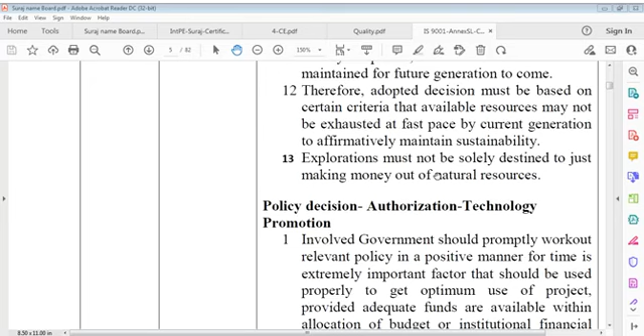Okay, dear friends, I tried to show you some glimpses of what I intend to do or what is intended to be done on the quality front, safety front. Usually I talk, but try that you should read yourself certain papers and pages. That's actually very important from each and every point of view.

Then this is one part while direct work on sites - that is construction methods, contracts, organizations, communication, coordination, and why we should always be behind the quality of works, quality of materials, and quality of whatever is involved in the system.

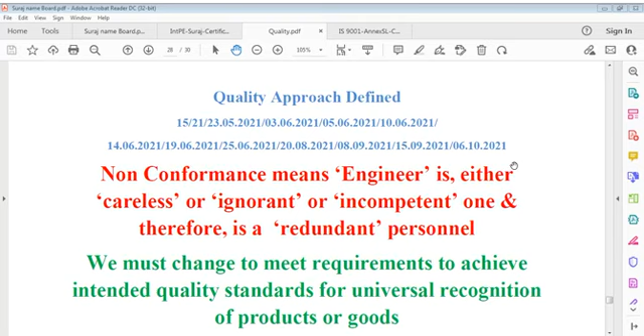This is a very important part to discuss. Now we talk about engineering - we talk about designs, we talk about prosecution of works, and we talk about applications when they are effective, and that's called engineering. And we can say a quality non-conforming product is called substandard and therefore rejected.

Yes, that's right. If we reject non-conforming product every time, just like we command in the management world - you do it right every time. Means do right every time, do quality work every time. You do the right work first time, every time. It is clear understanding from, you can say, organizational viewpoint or work viewpoint.

Just like we say safety first - yes, first everybody remains safe, must remain safe. Every time is first time. When you do something, do it safe, do not do unsafe. We can say nobody is safe if they are unsafe or they are ignorant.

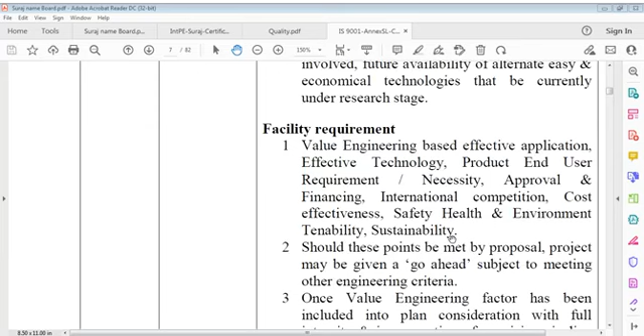It works. So we say policy decision, authorization, technology promotion. So that's what we have to do. Every government has to do. It's nothing new, it's not something extraordinary to do. It's job, we have to decide. And it's not for one country, it's for all countries. So we can say we had gone to certain justifications, and we may start

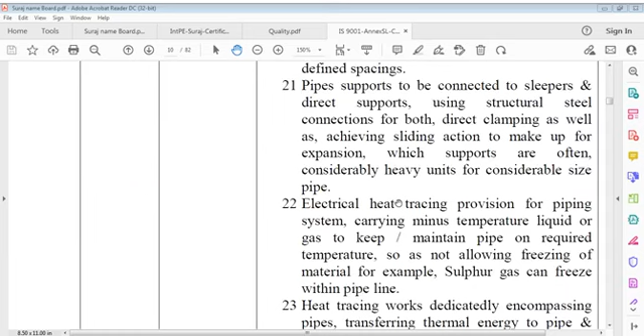We're talking of certain facilities yesterday. Facility justification, etc. we have done. I talked of that. What is justification? What is this? What is that? You are somewhere on components. Maybe I am jumping high. Let us say, what is that? Certain inclusions are here.

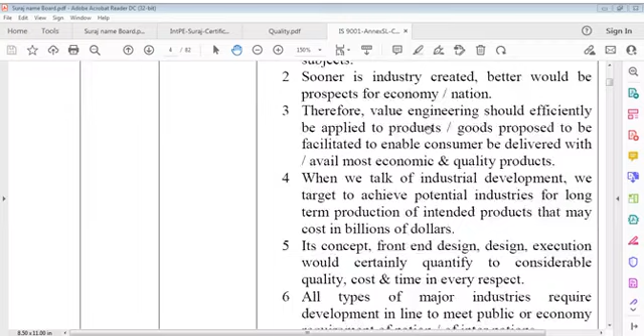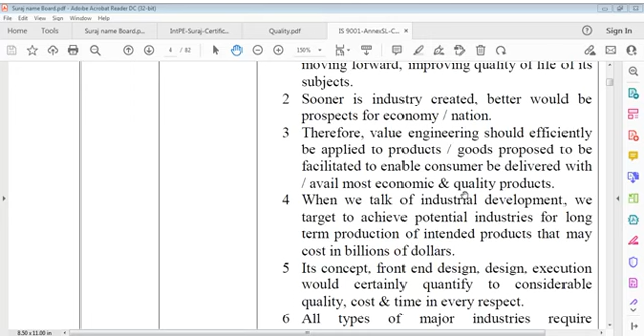When we talk of industrial development, we target to achieve a potential industry. We achieve potential industries for long-term production of intended products that may cost in billions. Its concept from front-end design feed execution was certainly quantified to considerable quality, cost, and time in every respect. All types of major industries require development in line to meet public or economic requirement of nation or of internations. Which class of industry should be promoted for modernization depends on various relevant criteria as well as development value engineering.

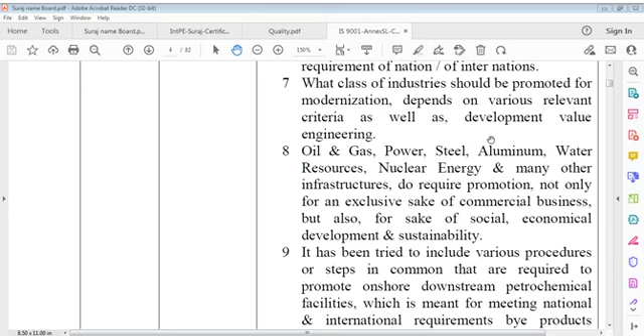We have discussed all this before. Now, back to discuss about, we were talking of policy decision, authorization - involved governments should promptly work out policies in positive, constructive, or development manner. For time is extremely significant factor which can be used properly to get optimum use of project, provided adequate funds are available within allocation of budget or institutional financial borrowing should be made.

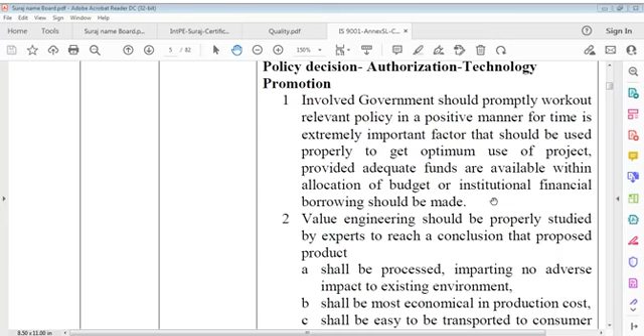Value engineering, as we discussed before, should be properly studied by experts to reach a conclusion. The proposed product shall be processed, imparting no adverse impact on existing environment, shall be most economical in production cost, be easy to be transported to consumer market, be most beneficial to national society from every aspect, view cost and economy uplift, as well as promote use of given technology and provide

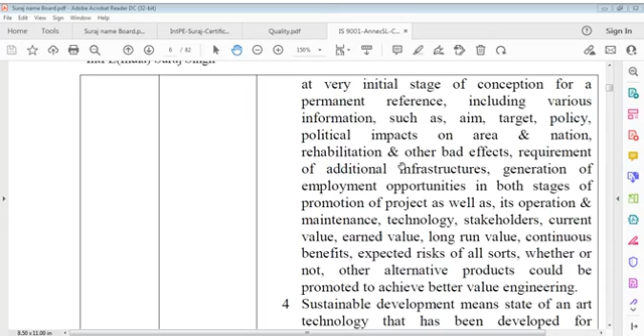Benefits to all people located globally in long run. A right and reliable charter must be constituted at very initial stage of conception for a permanent reference, including various information such as aim, target, policy, political impacts on area and nation or society, rehabilitation and other bad effects, requirements of additional infrastructure, generation of employment opportunities in both stages of promotion of project as well as its operation, and

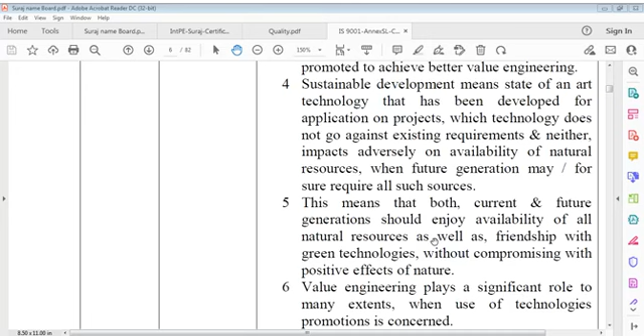Can say we have to achieve value engineering. In fact, maintenance technology, stakeholders, current value, earned value, long run value, continuous benefits, expected risks of all sorts, whether or not other alternative products could be promoted, achieve better value engineering. And sustainable development. Sustainable development means a state of an art technology on projects which technology does not go against can say existing requirements, or and neither now these are all concepts.

Value engineering work - it says value engineering plays a significant role to many extents. There could be options and options, all these are there. Now, what is saying facility requirement? Let's have a brief look on this. Value engineering based effective application, effective technology, product end user requirement.

Value engineering based effective application, effective technology, product end user requirement, necessity, approval and financing, international competition, cost effectiveness, safety, health and environment, tenability, sustainability. Should these points be met by social, economic reasons, the proposal or project may be given a go ahead.

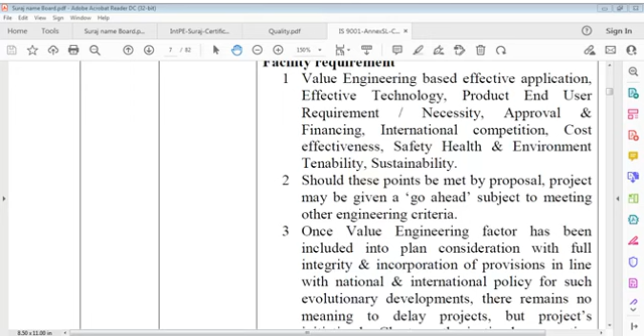Once the value engineering factor has been included in plan consideration with full integrity of incorporation of provisions in line with national and international policy for such evolutionary developments,

there is no meaning to delay a project's initiation; charter authorization by respective stakeholders should be done. Finances have to be allocated to statutory requirements to give the go-ahead for various phases and stages of project development, so delivery can be made in defined time for follow-up.

Operations for consumer and users: since facilities demand incorporation of inputs from various disciplines and personnel, material, and equipment with licensed technology, every criteria must be kept in consideration for final startup.

Facility justification feasibility, environmental sustainability, cost viability in the long term, nationally beneficial to add to economic growth, multi-purpose approach, and creation of employment, both casual and regular.

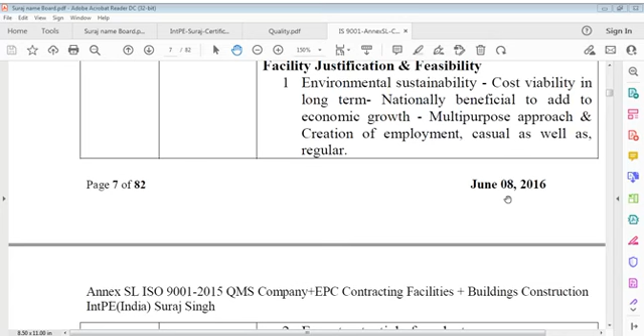So we can say, otherwise, export potential of product. Processing technology and availability of raw or natural resources.

Processing technology and availability of raw or natural resources, materials, adequacy of availability of terrain and routes, selection of planning and execution mode, availability of expertise and experts along with all other interrelated professionals, availability of all human and other resources, their original sources, international agreements for bilateral trades

with producing nations, finalization of design rights, copyright processes, technology license, agreement on various contract forms, adoption agreements on international workforce migration for projects, public-private partnership and government responsibility, international joint venture.

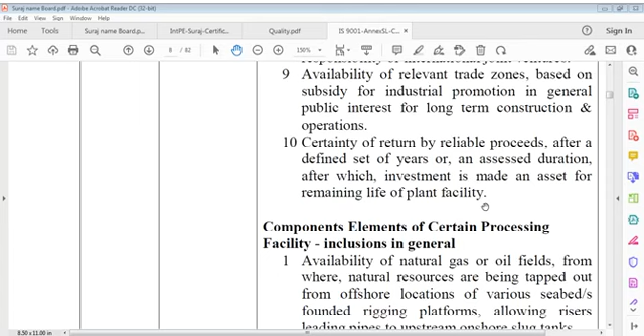Availability of relevant trade zones based on subsidy for industrial promotion in general public interest for long-term construction and operation, certainty of return by reliable proceeds after a defined set of years or an assessed duration, after which the investment is made an asset for remaining life of plant facility.

Components, elements of certain processing facilities - we say inclusions in general, let's say, just for purpose of understanding. I'm just trying to share my experience based projects here. It's not that this should be mandatory for everybody, just for purpose of explanation, purpose of extending or providing input, so that you may also think in that way.

And so, what may be included in projects could be elements of certain processing facilities. These are neither permanent nor integral, but how can something be applied without having a basis of justification?

Availability of natural gas, example is there in oil fields where natural resources are being tapped out from offshore location of various seabed founded rigging platforms, allowing risers, leading pipes to upstream onshore slug tanks.

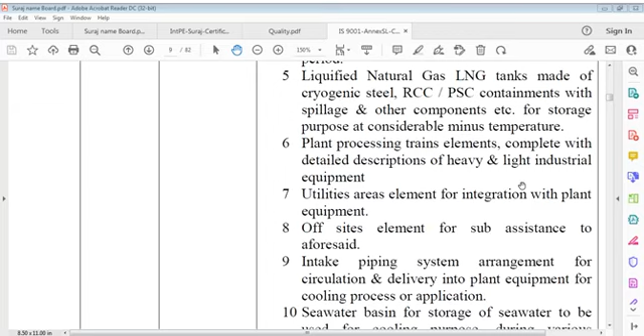Plant processing trains elements, complete with detailed descriptions of heavy and light industrial equipment, utilities, areas, elements for integration with plant equipment, offsite elements for sub assistance to aforesaid provisions and inclusions.

Intake piping system arrangement for circulation and delivery into plant equipment for cooling process or application. Seawater basin for storage of seawater to be used for cooling purpose during various processes, delivery of cooling water to plant and then recirculation for further cycles of processes.

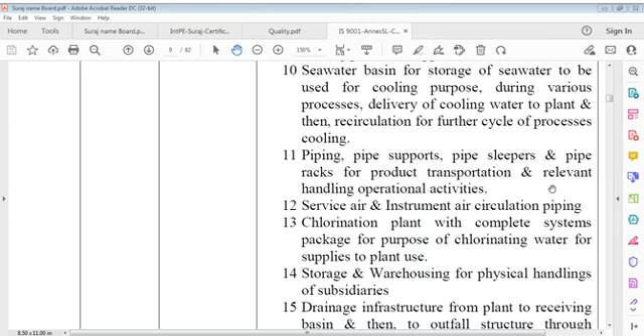Pipe supports, pipe sleepers, pipe racks, for product transportation, and relevant handling operational activities, service air and instrument air circulation piping.

Chlorination plant with complete systems package for purpose of chlorination, water for supplies to plant use, storage and warehousing for physical handlings of subsidiaries.

Drainage infrastructure from plant to receiving basin, and then to outfall structure to discharge channels, duly provided with metal locks and channels. Ditches completely lined to convey out to final discharge stormwater from various catchment areas of plants. Complete package drainage system for oily water, acid water, dusty water, sewage, etc.

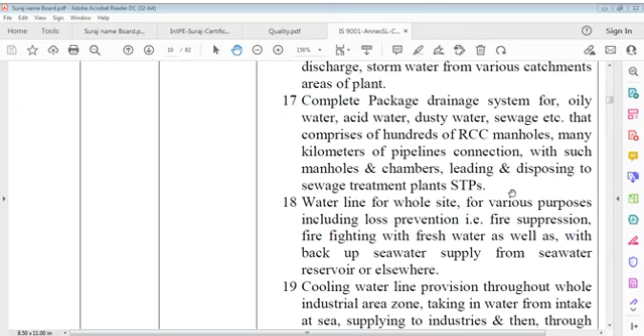This comprises hundreds of RCC manholes, many kilometers of pipelines, connection with such manholes and chambers, leading and disposing to sewage treatment plants, STP.

Water line for whole site, for various purposes.

Including loss prevention, that is fire suppression before it happens.

Firefighting requires to be avoided if loss prevention is done. Fire suppression, firefighting with fresh water as well as with backup seawater supply from seawater reservoir or elsewhere.

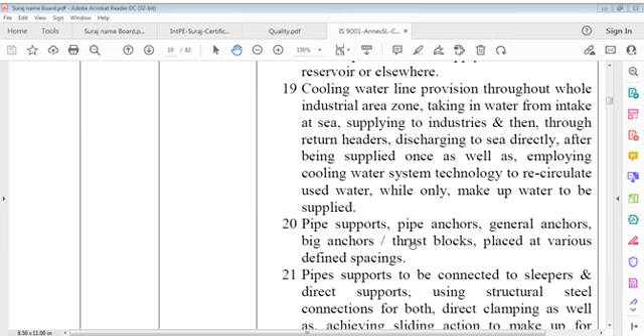Cooling water line provision throughout whole industrial zone, taking in water from intake at sea, supplying to industries, and then through return headers discharging it to sea directly after being supplied once, as well as employing cooling water system technology to recirculate used water and only make up water to be supplied.

Pipe supports, pipe sleeve, pipe anchors, general anchors, big anchors, thrust blocks placed in various defined spacings. Pipe supports to be connected to sleepers and direct supports using structural steel connections for both direct clamping as well as achieving sliding action to make up for expansion, which supports are often considerably heavy units for considerable size pipe.

Electrical heat tracing provision for piping system carrying minus temperature liquid or gas, to keep maintain pipe at required temperature so as to not allow freezing of material. For example, sulfur gas can freeze within pipeline.

Heat tracing works repeatedly, encompassing pipes, transferring thermal energy to pipe and then to internal available gas at minus temperature, so that the gas does not freeze in pipe but keeps on flowing at specified temperature and velocity.

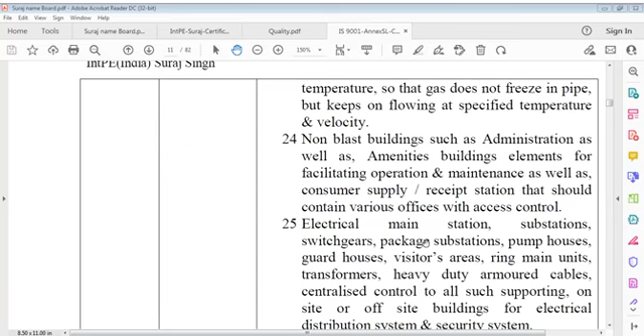Non blast buildings, such as administration as well as amenities buildings, elements for facilitating operational maintenance as well as consumer supply / receipt station that should contain various offices with access control.

Electrical main substation, substations, switch gears, package substations, pump houses, guard houses, visitors areas, ring main units, transformers, heavy duty armored cables, centralized control to all such supporting on site or off site buildings for electrical distribution system and security system.

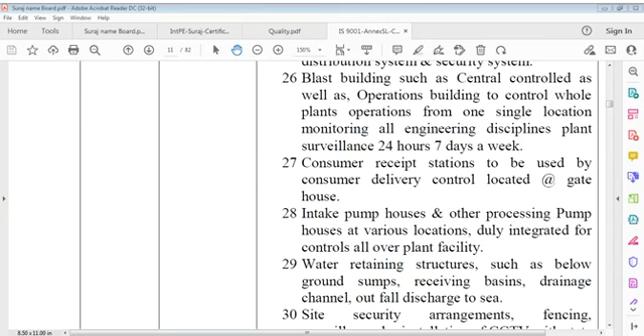And we can say water retaining structures such as below ground, sumps, receiving basins, drainage channel, outfall discharge to sea.

Site security arrangements, fencing, surveillance by installation of CCTV with state-of-art technology.

Site telecommunications of all sorts for effective, efficient use by operating personnel available in all security zones spread over entire facility. All loss prevention arrangements including internal and external firefighting.

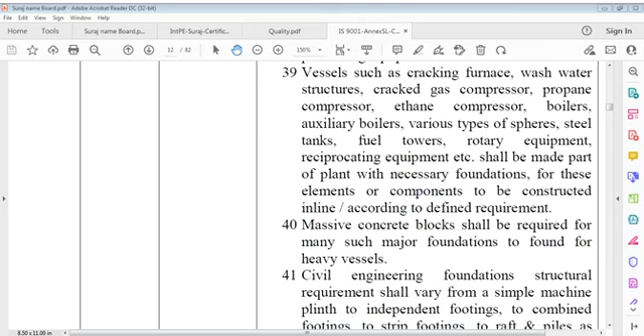Civil engineering foundations structural requirement vary from a simple machine plinth to independent footings, to combined footings, to strip footings, to raft and piles, as well as massive block foundation.

Concrete shall generally be low heat producing cement paste manufactured by using microsilica or GGBS, ground granulated blast furnace slag, replacing cement up to 70% extent, and also pulverized fly ash PFA treatment for replacement.

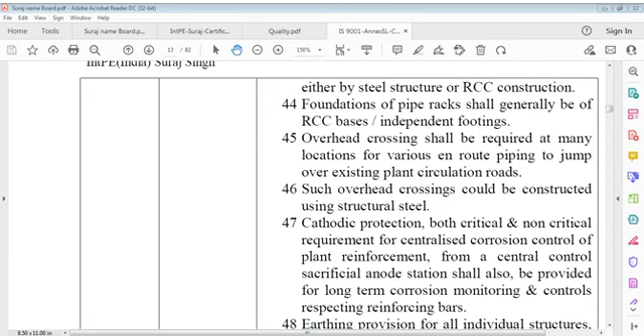Heavy duty concrete pavement shall be provided in all plant areas for required maintenance purposes, respecting machines as well as movement of heavy vehicles. On other areas where no pavement is included, stone aggregate shall be spread and compacted to avoid adverse soil impact effects.

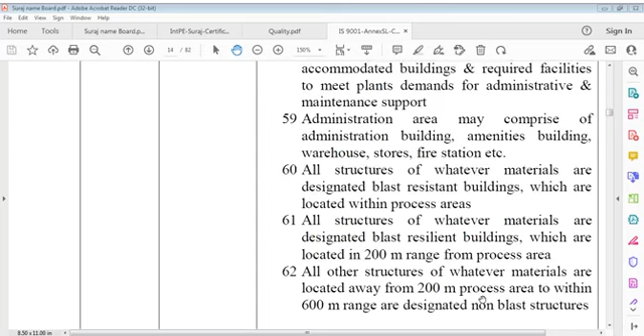All structures of whatsoever material located within process areas are designated blast resistant buildings. All structures of whatever material located within a 200 meter range from process areas are designated blast resilient buildings. All other structures located away from 200 meters up to a 600 meter range from the process area are designated non-blast structures.

Now I will go into the components brief on LNG tanks. You might have seen those LNG tanks I showed you in that photo previously, which are not as visual as we thought.

Career projects involved, just a minute please. Let me see if I can find something out of that. Better if you can see something in career projects involved. I tried to show you the other day glimpses of that, sometimes important, you can see that one. Career projects involved, let's see, I can show you something in there. Let me see if I can show you something in there. Maybe I have that one, I don't know.

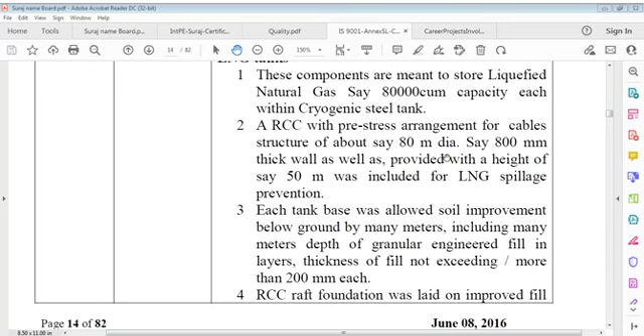Each tank base was allowed soil improvement below ground by many meters, including many meters depth of granular engineered fill, with layers thickness of fill not exceeding 200 mm each. RCC raft foundation was laid on improved fill, pre-engineered formation, after ensuring achievement of required design safe bearing capacity.

Pre-engineered formation after ensuring achievement of required design safe bearing capacity. Top of tank was covered - top of tank was covered with a permanent formed cupola structure.

We have seen that, this is again I show you - this is cupola structure, this is cupola structure. Cupola here, this is vertical, you can see here - vertical surface is this. And here is what I say: top of tank was covered with permanent formed cupola structure, raised to its level by using compressed air pressure lifting. Compressed air pressure lifting.

Cryogenic steel was included for construction of the LNG tank, to maintain about minus 160 degrees Celsius temperature of condensed gas. So we can say minus 160 degrees temperature of available gas - it's too low, minus 160s.

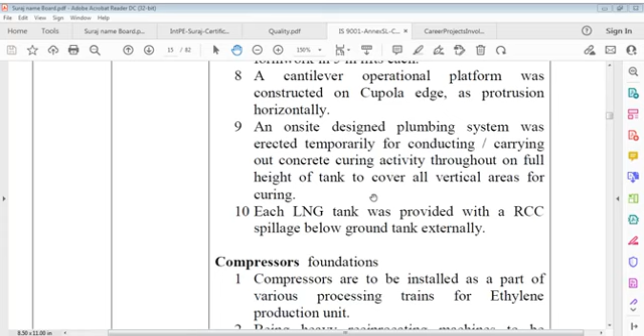Each LNG tank was provided with an RCC spillage below-ground tank externally, along with compressor foundations.

Now, LNG, I'll take off - there's no meaning with this. I'll explain this one now. Let's now go to see if I can do something else. Talking of something here, let's - yes, here are foundations, may say that. For example, I say...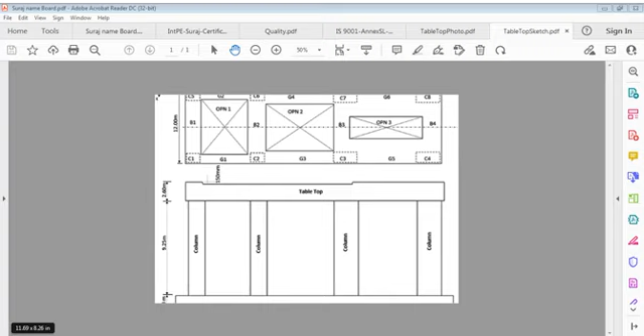And also the tabletop - I think that's a photo here, nothing else to do with that. Recognize that one, and there you can see. So you got it, you understand what I mean. I put it off also so it doesn't come in the way. Just take it off from this one.

So, foundation concrete for one cracking gas compressor - compressors are to be installed as part of various processing trains for the ethylene production unit. Being heavy reciprocating machines, they are to be installed on massive foundations at elevated levels. Tabletops will be constructed resting on massive concrete foundations.

Foundation concrete for one cracking unit compressor being say 500 cubic meters, 25 meters long, 10 meters wide, and 2 meters - well designed machine foundation for a reciprocating vibrating equipment. This foundation carries thick columns, thick members, meaning sectional size more than 0.8 meters, and RCC quantity greater than 8 cubic meters.

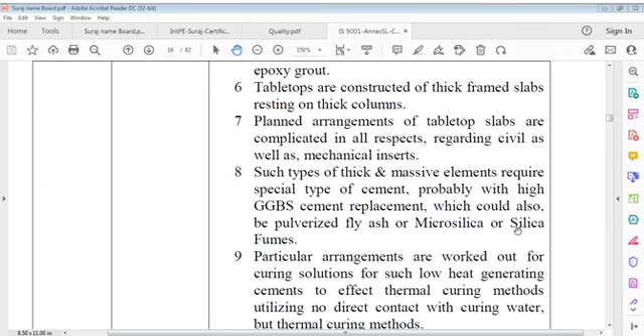Planned arrangements of tabletop slabs are complicated in all respects regarding civil as well as mechanical inserts. Such types of thick and massive elements require special type of cement, probably with high values, high replacement GGBS cement, which could also be pulverized with fly ash or microsilica or silica fumes. Particular arrangements are worked out for curing solutions for such low heat generating cements to effect thermal curing methods, utilizing no direct contact with curing water but thermal curing methods.

It should be made clear the foundation block is massive concrete and may not be misunderstood as mass concrete. A massive block is higher in status than a thick element.

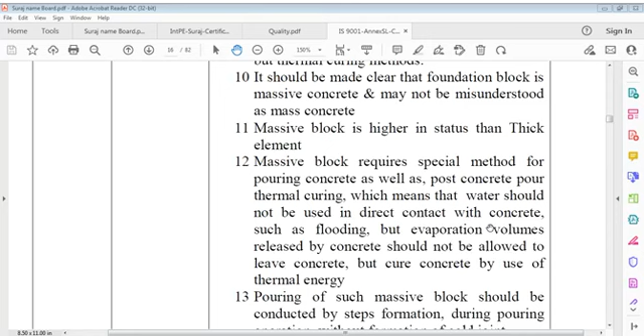Let me read this again, this is important. Particular arrangements are worked out for curing solutions for such low heat generating cements to effect thermal curing methods, utilizing no direct contact with curing water but thermal curing methods. It should be made clear the foundation block is massive concrete and not mass concrete - do not misunderstand. A massive block is RCC, higher in status than a thick element. A massive block requires a special method for pouring concrete as well as post-concrete-pour thermal curing, which means water should not be used in direct contact with concrete, such as flooding, but evaporation volumes should be managed.

Pouring of such massive block should be conducted by step formation during pouring, without formation of cold joints. Evaporation volumes released by concrete should not be allowed to leave the concrete, but should be used to cure the concrete by thermal energy. Not allowing evaporation to escape, and using this evaporation to cure, is named the thermal method.

Now we talk of cracking gas furnaces. We talked about this here - it's of course very significant. We talk about the basics of foundations of such structures. In fact, it's a very significant consideration from every viewpoint we have to consider, from each and every viewpoint. We talked about the pouring - you might have seen that.

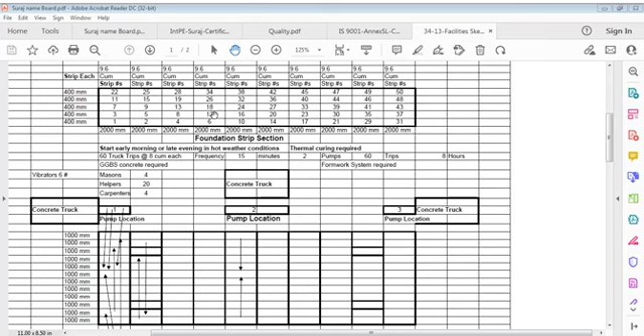Also you can see, let us say this is a foundation here, and in section it's like this, and because each activity is done here, 50 layers are to be laid in this case. 50 layers, here is 1, here is 50, here is 22, here is 31. So diagonally, if you see 1 goes to 50 here, and then 1 goes to 2, then 3, 4, 5, 6, 7, 8, 9, 10. Then you can see acute angles being spread everywhere.

And quantity is 9.6 cubic meters in each layer. So you can see there are 50 layers. So 9.6 into 50, then see, is 480 cubic meters. It should be 480, or say approximately. We have to plan accordingly, and that is very important.

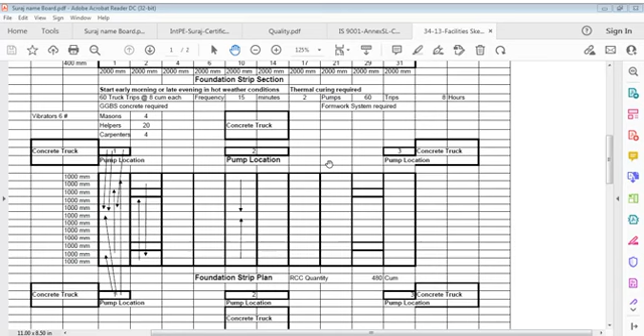Position of pumps, location, position of trucks here, all this is shown. There was a purpose of conferring on how to do concreting of that. So this is that point where we can say we can then take it off now because the purpose is over. So we close it and we'll see how to move further.

So I tried to show you the sequence of concrete construction, concrete pouring for massive blocks of 480 cubic meters of concrete. It's 480 here, it can be whatever quantity. You have to plan accordingly, and this is for the purpose of cracking gas received from the refinery as a byproduct, for transmission to compressors for production of ethylene as well as propylene.

Now, since these are all heavy structures vertically oriented in a group of vessels and founded on a common base.

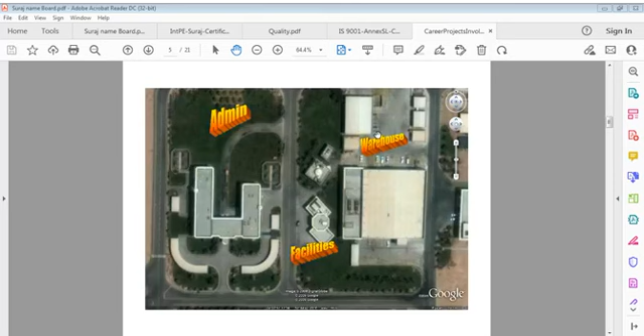Starting from here at C, this is the administration area, this is the warehousing area, this is the processing plant, the support of that. Likewise, you can see this is different types of areas, admin warehouse facilities, and this is the process area, this is the electric substation.

And we're talking of this all process area. This is wash water structures and boilers here, compressors here, and likewise, cracking furnaces are all here. And you can say this is the compressor area and plant process area.

You can say same way here, and you'll find racks here, pipe racks as usual, and this is a complete process here. You can say then seawater basin here, and likewise substation roads and all that. And these are energy tanks we discussed before. Firing, shooting range, that's a different one.

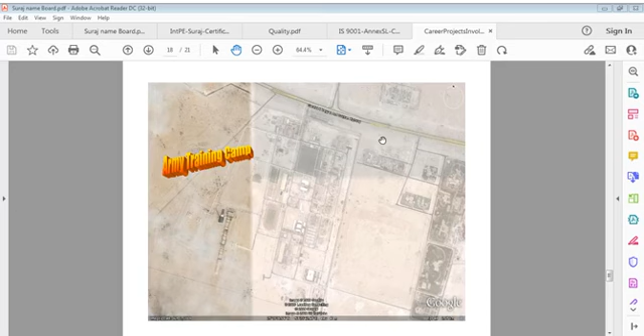So I try to say all are covered in here. So we know what we are talking of. In fact, that's the reason we are talking of. And we can say then, okay, that's fine. And we are talking of this here.

So the site included structures. They include wash water structure as one, auxiliary boiler is also one, that is within the processing train. Also, you can say included various vessels such as spheres to contain gases, as well as tanks for storage.

Foundations for tanks are generally constructed of RCC ring beams. Other structures are generally provided with independent footings, strapped using grade beams.

Now, another structure which is very important is the seawater basin. These structures which we discuss, other structures are not very difficult to construct. These are not very complicated, just ordinary footings. Ordinary footing in a way means isolated footings or beams connected together, or if you can say not more than that, I think, because it's all fill area, granular fill area.

There is no clay strata, and if they have no clay strata, then treatment will be different. No, these are other structures. Normal structures mean just ordinary building structures. For example, RCC ring beam is just an ordinary structure. But we have other structures, for example, water retaining structures.

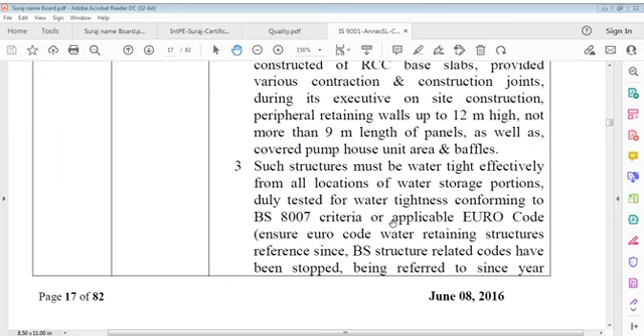Such structures must be watertight effectively from all locations of water storage portions, duly tested for water tightness conforming to BS 8007 criteria or applicable Euro code. Ensure Euro code water retaining structures reference, since BS structure related codes have stopped being referred to since year 2010.

Concrete protection is applied for both below ground as well as above ground RCC surfaces. This concrete protection against soil, as you know, applies to both below ground as well as above ground RCC surfaces.

Testing would be little cumbersome, for many days. The factor to be used for computing evaporation losses was complicated, since no pertinent standard data was available.

A parallel arrangement as a device has to be arranged to observe real evaporation loss, the model result of which would be applied to reservoir operational observations.

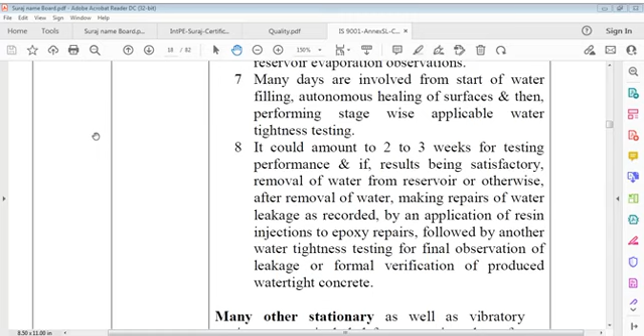Concrete. We talked of this tank. Of course this is just a format of EPC. In Annex SL, only information is allowed; I'm not giving you the total work done for this.

For this, you can say water tightness test. But we should consider that this is significant, very significant, because this structure is a water retaining one, which means water tightness is top priority in this case and in every such case, because the purpose of this reservoir is to retain water, and if water leak is allowed, that purpose is defeated. We have to keep the purpose safe and working.

Design should be at that level, and its working, its execution should also have that level of achievement, that water cannot be lost through itself without any meaning, because we have to consider every point in this. Water tightness test is very significant. I think I've discussed that before in depth, the water tightness test of this one.

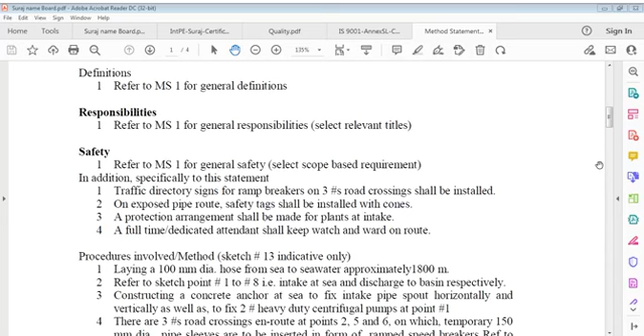Since the quantity of water required to conduct the water tightness test, once the seawater basin has been constructed, is very high, it is not convenient to transport and fill the basin using water tankers efficiently and economically. So it says something, I think it was just a method to convey water from sea.

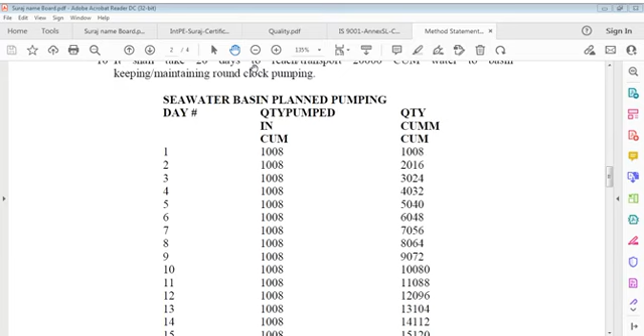How we would do that, but that's not the problem. My intention was not to show you how water shall be procured from the sea. Here's the point I wanted to show you: seawater basin planned pumping, that is what is important from pumping. So let's concentrate on this.

It is day 1, day 2. It is quantity pumped in, and quantity cumulative. This is important in this case. It says first day we procure water, that is 1008 cubic meters in one day. So this is cumulative quantity, and it goes on accumulating, so on the 21st day it is 21,168 cubic meters.

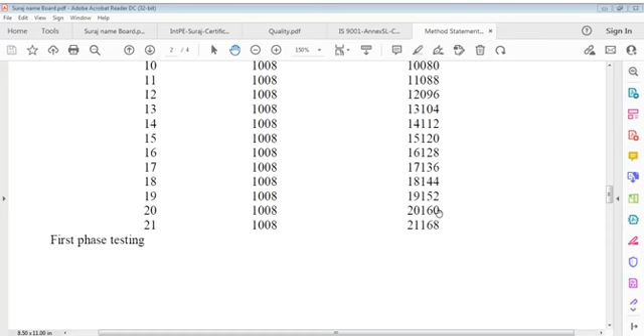On the 21st day, we cannot fill it directly. There's a limit to which you can fill, because it requires autogenous healing itself. It's a kind of requirement once water is filled, and accordingly we comply with that.

Then we can say what it says for testing purpose. There are so many specifications for one thing, and they should not mix up. Some specifications say one part, some say another part. In fact, practically speaking, when the tank is full, it's in service, meaning everything has been done.

Everything has been done. You can say if specifications say you have to show water tightness when it's complete in use, or you have to show water tightness where nothing has been done except the concrete structure, now it's up to those who decide, what do they think? I'm not sure specifications can provide this information, but we have to question ourselves.

It says tank completed with protective coatings. One point is, if you see from the use point of view, from the practical aspect, not just theoretical, water shall be filled and used while in the completed state. This means water concrete protection shall be provided, further protection shall be provided, backfill shall be provided, and everything shall be done, and then it will be used.

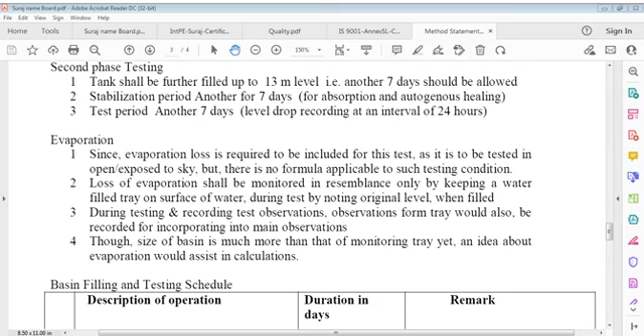Now, what it says - basin filling and testing schedule. You can say first phase water pumping, 14 days, duration in days 14. Pumping from sea, you can say, or whatever else, doesn't matter. If you don't take from sea, you have to bring water from elsewhere through tankers, so it doesn't matter how you do that - site has to decide whether there's sea or no sea. Then retained water stabilization to allow absorption and autogenous healing, that is 7 days.

Testing at 24 hours intervals and monitoring, that is 7 days. Loss should not be more than 1/500 of average full water depth or 10 mm or other specified value.

But backfilling after successful testing, 14 days second phase water pumping, 7 days retained water stabilization and autogenous healing, and testing at 24 hour interval. Then water loss monitoring - loss should not be more than 1/500 of average full water depth or 10 mm or other specified value, but excluding evaporation.

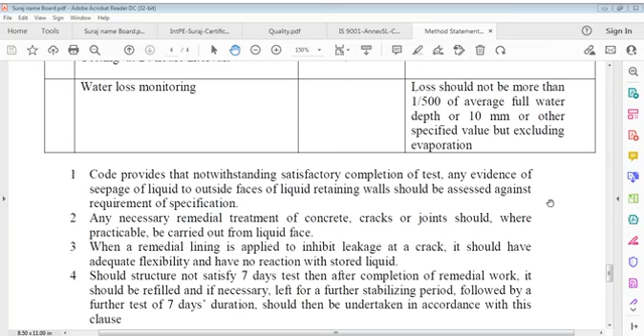Now, code provides - what does code provide? It says the code provides that notwithstanding satisfactory completion of test, evidence of seepage of liquid to outside faces of liquid retaining walls should be assessed against requirement of specifications. Necessary remedial treatment of concrete cracks or joints should, where practicable, be carried out from liquid face.

Remedial treatment of concrete cracks or joints should, where practicable, be carried out from liquid face. When a remedial lining is applied to inhibit leakage at a crack, it should have adequate flexibility and have no reaction with the stored liquid.

Should the structure not satisfy the 7 days test, then after completion of remedial work, it should be refilled and, if necessary, left for a further stabilization period followed by a further 7 days test. Duration should then be undertaken in accordance with this clause.

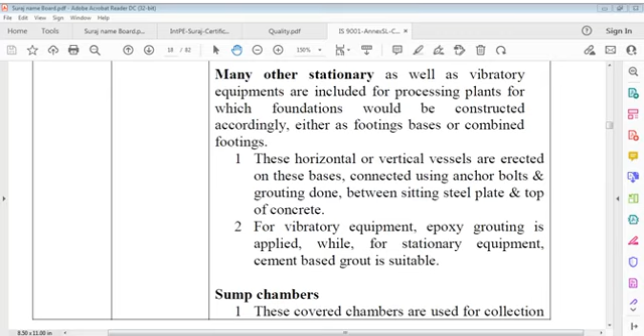Many other stationary as well as vibratory equipments are included for processing plants, for which foundations would be constructed, either as footings, bases, or combined footings. These horizontal and vertical vessels are erected on these foundations, connected using anchor bolts, and grouting is done between the sitting steel plates and the top of concrete in that space. For vibratory equipment, epoxy grouting is applied, while for stationary equipment, cement-based grouting is suitable. This is just the principle we are talking of.

Now we go to sump chambers. What are sump chambers? I think you remember I explained sump chambers. Yes, if you forgot, no issue, I'll find it again, and show you the water tightness sump chambers - I think a sketch is more important than this. Let me show you this method statement also for reference, and here I'd like to show you the sketch. It's also very important, the sketch of the sump chamber. Sump chamber, yeah, I got it.

We rotate it, it's better if I rotate it. So here is the sump chamber, you can see that one. That gives some time now, about 5 minutes, I'll be back, and by that time we'll understand this chamber.

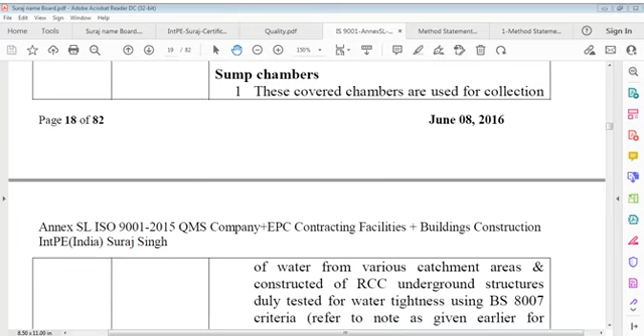I think I'm late, no problem, what to do, there's no other way. Late or not late, what to do? I have to go here and went here. Let us go and see and talk about this. I think they have taken care of the sump chamber which I showed in the display. I'll put this off, accept this collection chamber. I put this off, but I think I should put this off - the sump chamber is there, which one should I put off? No, no problem, let it open and we will continue.

Now this is the plan of the sump chamber, and here is a very simple structure. You can see just 14.2 meters by 9.2 meters - dimension doesn't matter. Here is 1 meter projection for this foundation, and 8 meters is the internal headroom. This is the inlet and outlet - inlet, this outlet. It's so simple, there's nothing as such, it's closed of course.

So we may say we're not talking of safety here, we're talking of structural testing. Here is the statement of this - these are the numbers and notations, and we have to check again the same. An important point is that quantities are given, but that doesn't matter - not as much quantity as in the seawater basin case, it's different, very small quantities of course. But the method is the same. Sketch 9 is preferred.

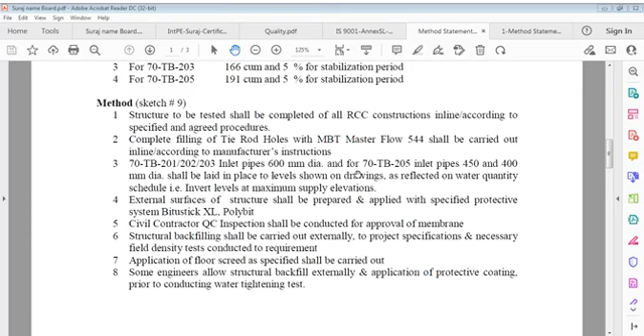The structure to be tested should be complete of all RCC constructions in line according to specified and agreed procedures. Complete filling of tie rod holes with MBT master flow - you cannot leave them, otherwise what is involved - shall be carried out in line according to manufacturer's instructions. Inlet pipes of 600mm or other separate diameters for all ones, so it doesn't matter. The external surface of the structure shall be prepared and applied with specified protective as we did before, and likewise the same procedure applies. This is about water testing.

Watertight testing should be considered without carrying out backfilling and application of the waterproofing system, for accurate assessment as well as compliance with tanking technology. The entire surface of the structure to be tested shall be sealed plastered, removing all loose piles, dust, dirt. Prepared internal surfaces shall be inspected by the civil contractor, and the following operations shall be involved to conduct water tightness tests in line with BS 8007, applicable to liquid retaining structures. A graduated stick shall be provided on the wall top to show the water level to a mm count.

Potable water shall be filled into respective sump pit structures at a rate of 2 meters per 24 hours, for which a test filling schedule shall apply. After water is filled into the required level, it shall be allowed to stay for a period of 7 days for stabilization, absorption, and autogenous healing.

If required, water shall be added to maintain maximum test level in case it is lost during this period. Test shall commence from the 8th day and continue for 7 days for a designed crack width of 0.1 mm according to specification requirements. Observations regarding water level drops shall be recorded every 24 hours by visual measurements on mm scale. Test records shall be documented on the attached form.

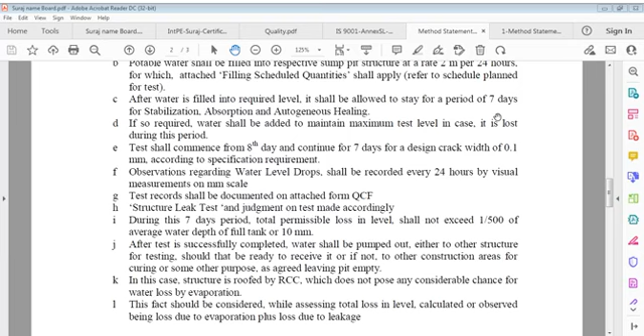Structural leak test and judgment on test method accordingly during the 7 day period. Total permissible loss in level shall not exceed 1 over 500 of average water depth in a full tank, or 10 mm. After the test is successfully completed, water shall be pumped out either to another structure for testing should that be ready to receive it, or if not, to other construction areas for curing or some other purpose.

This structure is roofed by RCC, which doesn't pose any considerable chance for water loss by evaporation. Especially consider while assessing total loss in level, calculated or observed being loss due to evaporation plus loss due to leakage.

Remedial works: in case of unsatisfactory performance of the water tightness test, and upon agreement with the contractor engineer, injection grouting method may be adopted to seal back seepage routes. It must be marked based on inspection during leakage.

Should the structure not satisfy the 7 day test after completion of remedial work, it should be refilled and, if necessary, left for a further stabilization period as conducted earlier. A further test of 7 days duration must then be undertaken in accordance with the specific code. So we can say, schedule here.

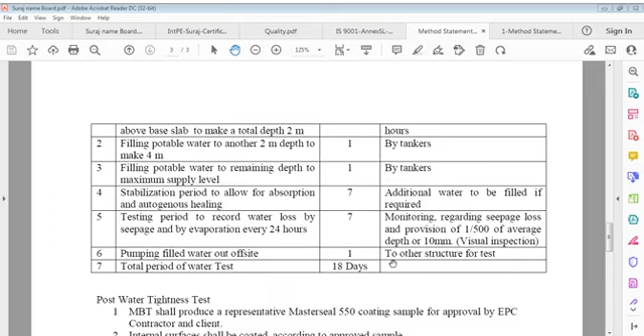First is filling potable water in sump pit, 1 meter deep, for 1 day. Tank filled at a uniform rate, targeted at 2 meters per 24 hours. And here's the other one.

Next is filling potable water to another 2 meter depth, to make 4 meters. In this case, we are not getting water from the sea, we are getting water through tankers because it's a very small quantity. Then third is filling potable water to the remaining depth, by tankers, that is the maximum supply level.

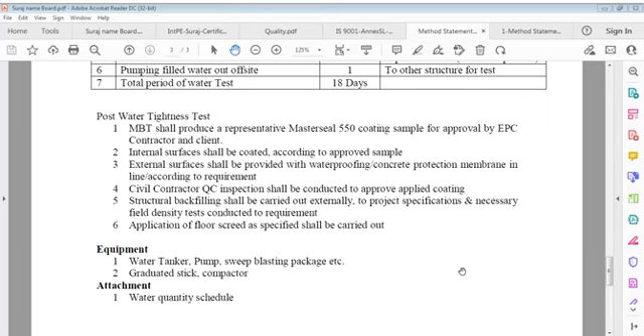Civil Contractor QC inspection will be done. Structural backfilling shall be carried out externally as per project specifications where necessary. Field density test is conducted as required. Application of floor screed as specified. So this is what we say.

I close this now, its purpose is over, and we can close this also, its purpose is over. So this was sump chambers we have discussed now. These covered chambers are used for collection of water from various catchment areas, that's what we are talking about now.

Various catchment areas are constructed of RCC underground structures, duly tested for water tightness using BS 8007 criteria, refer to the note given earlier for seawater basins. Now, concrete protection is applied both below ground as well as above ground.

Manhole catch basins and rainwater recesses are constructed using RCC materials. Manholes are meant for sewerage lines, oily manholes for oil discharge, catch basins for rainwater. Generally these units, manholes are meant for sewage lines, oily water manholes for oil discharge, and catch basins for rainwater.

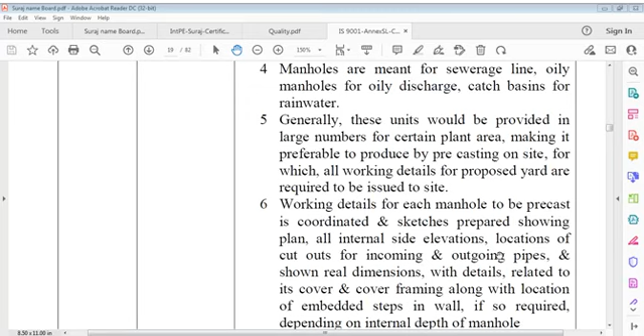Generally, these units are provided in large numbers for certain plant areas, making it preferable to produce by precasting on site, for which all working details for the proposed yard or factory, or site, are required to be issued to site. Working details for each manhole to be precast.

Working details for each manhole to be precast are coordinated and sketches prepared showing plan, all internal side elevations, locations of cutouts for incoming and outgoing pipes, and real dimensions with details related to its cover and cover framing, along with the location of embedded steps in wall, if required, depending on internal depth of the manhole.

Open ditches. Hey, if you want to see this, it can be shown.

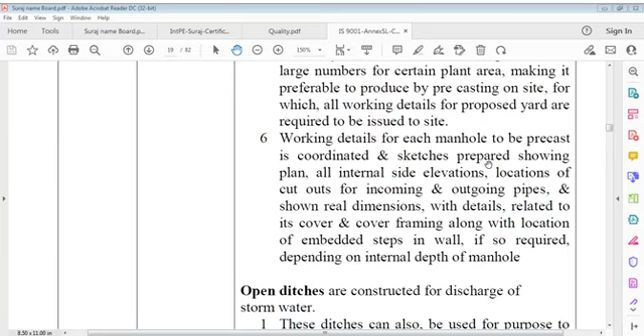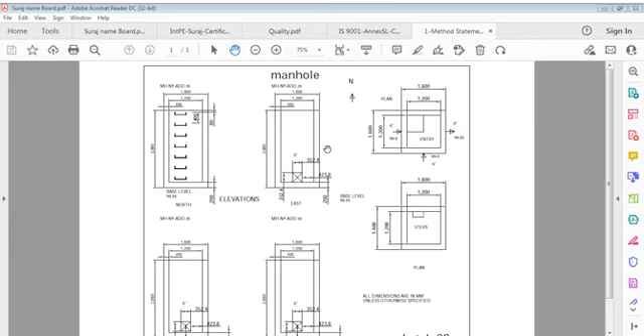So you can see these are 4 elevations: north, south, east, west, and this is a plan. It clearly indicates, if you look closely, depth and openings. It is typically sketched, and there are many such sketches. For example, if you are inside this plan, where is north, south, east, west, if there is a wall only or some block-out depending on pipe size, where steps go in, all this is shown here. This sketch is prepared for every unit, whether sewerage manhole, catch basin, or other, and that's where we can resolve this problem. So for each manhole, precast coordinated sketches are prepared showing the plan. That's what I tried to show you. You can see that for a minute.

It's just a model. Every unit requires some detailing, and even if there's a clash on site, further resolution should be done. That's the only way to deal with this; otherwise we can't. So that's the basics: working details of each manhole are prepared as precast coordinated sketches showing plan, all internal side elevations, locations of cutouts for incoming and outgoing pipes with dimensions, details related to cover and cover framing, along with locations of embedded steps in wall, if so required depending on internal depth of manhole.

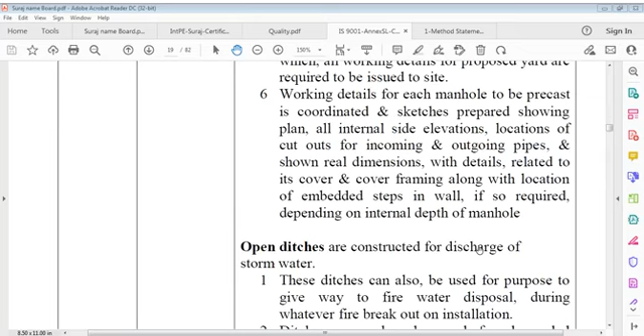Now I think we should close this since there's nothing left here. We're talking open ditches now. Open ditches. What are open ditches?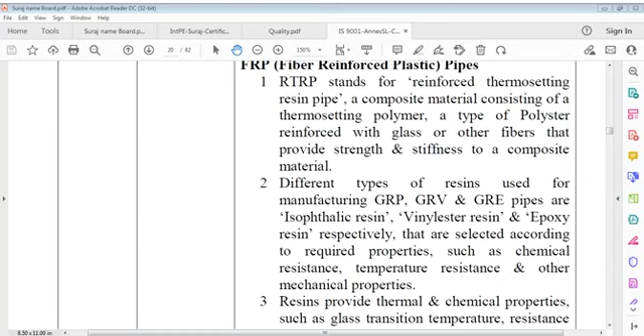Sorry, cough, I can't speak a lot I think. Resins provide thermal and chemical properties such as glass transition temperature, resistance.

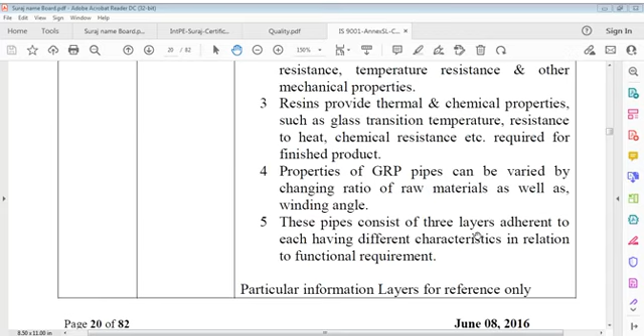Resins provide thermal and chemical properties such as glass transition temperature, resistance to heat, chemical resistance, etc., required for the finished product. Properties of GRP pipes can be varied by changing the ratio of raw materials as well as winding angle.

These pipes consist of three layers, each having different characteristics in relation to functional requirements. This particular information layer is for reference only.

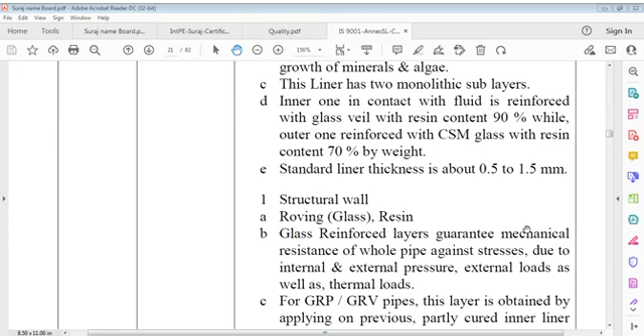Standard liner thickness is about 0.5 to 1.5 mm. The structural wall, made of roving glass with resin, guarantees mechanical resistance of the whole pipe against stresses due to internal and external pressure, external loads, as well as thermal loads.

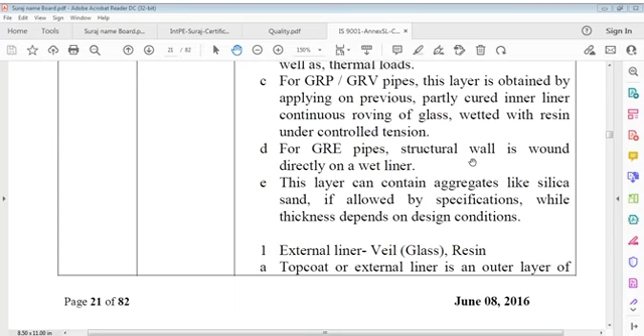For GRP / GRV pipe, this layer is obtained by applying continuous roving of glass, wetted with resin under controlled tension, on the previously partly cured inner liner. For GRE pipes, the structural wall is wound directly on a wet liner. This layer can contain aggregate like silica sand if allowed by specifications, while thickness depends on design conditions.

The external liner, or top coat, is an outer layer of the pipe consisting of pure resin. UV protectors may be added if required to protect the pipe from the effect of solar exposure. In case of severe exposure conditions such as aggressive soil or a very corrosive environment, this external liner can be reinforced with a surfacing veil or added with fillers or pigments.

Fiberglass composites consist of glass fiber reinforcement, thermosetting resins, and additives, designed and processed to meet specific functional performance criteria.

I think it's already more than 3 hours, so I think we should stop now for the time being, because it's a very interesting topic, and that is epoxy pipes.

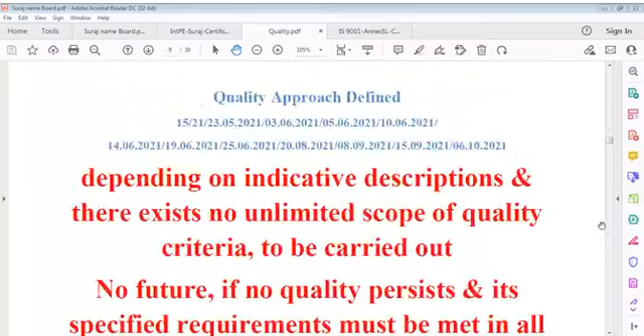I'll take care. Meanwhile, we have gone through the quality system, which is very important as we discussed today, and that's why it's done. If we cannot apply our engineering or sciences to quality achievement, there remains no meaning of quality at all - it has got no meaning. That's the only reason I'm trying to spend time on this. Really, it's very interesting that we have to be careful about this, or else the whole project of this talk goes to waste, no need of that. So we have to be very careful what we are talking of, and how we talk of it. That point must be carefully understood.